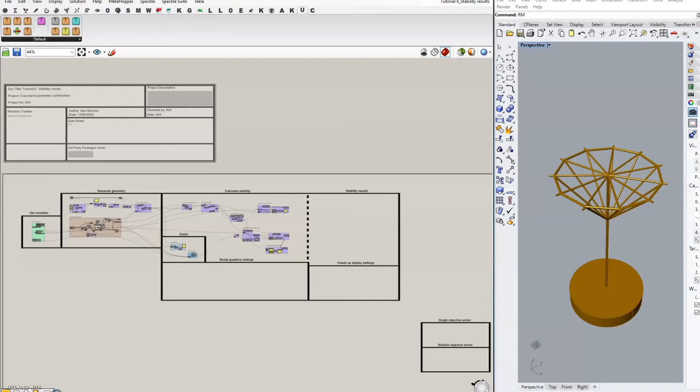And we're going to work out whether or not this actually does fall over or not, given the most unstable condition. We're going to add in an accidental destabilizing load as well. For example, someone could knock the stand quite reasonably from the side, and that's something that we need to take consideration of. So those three things we're going to add in to our stability results, and they're going to feed our heads-up display, and they're going to feed our multi-objective solver and our single objective solver in the next tutorial.

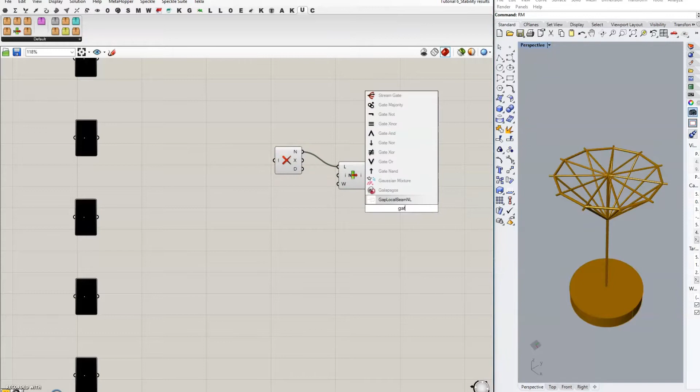Right, so first thing we need to do is grab a null item component. I'll explain why we're doing that in a second. So null item. And then we're going to list item, retrieving a specific item from a list. And I just want to take whatever comes out of here, I want to have the first item. And I'm going to feed that into a gate. Stream filter, which is a gate again, terminology. Right, and I want to set the value of true as 0.

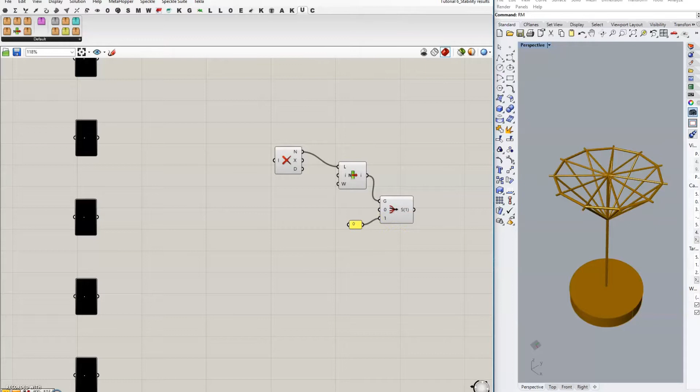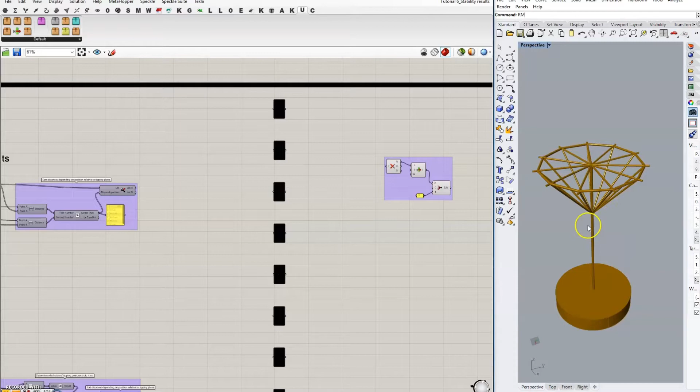Now, what I'm doing here is, I'm going to group those. What I'm doing here is I am accounting for the fact that if the base is a certain size, if it's very small, then all of the coats will produce a destabilizing moment, and none of them will provide a stabilizing moment. And let's turn on some of the coats to see that in action. Where did we get to? Least balanced. Here we go.

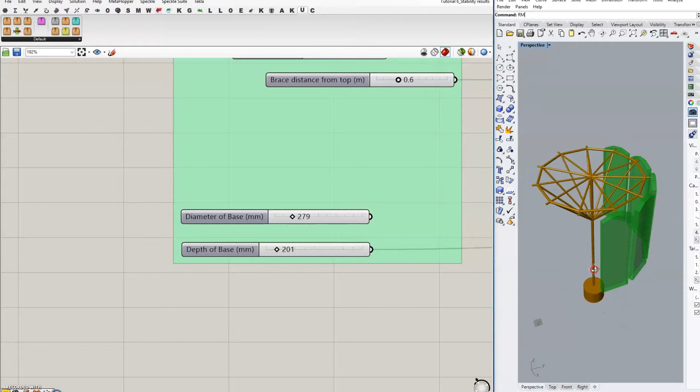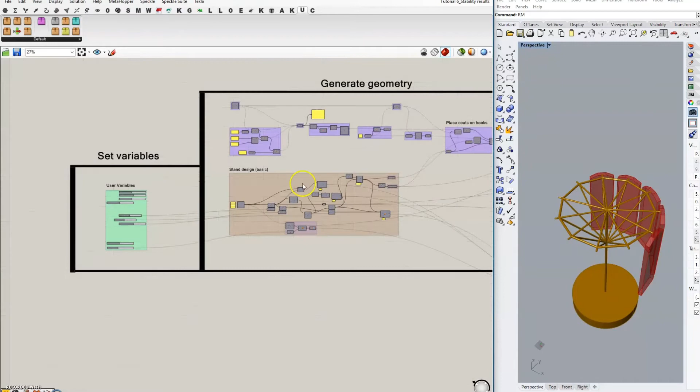So let's add in some geometry, the geometry bin. So there we are. So if I were to make the base of the stand very small, we can understand that all of these are contributing to destabilizing. Whereas if I make the diameter very big, then some of them actually aren't. And potentially if you decide to make the diameter boundary even bigger, they might all contribute to the stability of the base. And we want to be able to know whether or not that's happening. If we don't get any data feeding through into our results, we will get a null flag, and that can disrupt the flow of our script.

So I'm going to connect up list A, remembering that either of these could be null, could have nulls in them, and we want to know that. And if there are no nulls, then we want the data to flow. So if it's false, if there are no nulls, we want that data to flow through. What is that data? The distances, the lever arm of the coats. But if there are nulls, so if all of these are null, then we don't want anything to follow through. The reason for that is because we're going to be multiplying by a load. We don't want any of the nulls to multiply by a load.

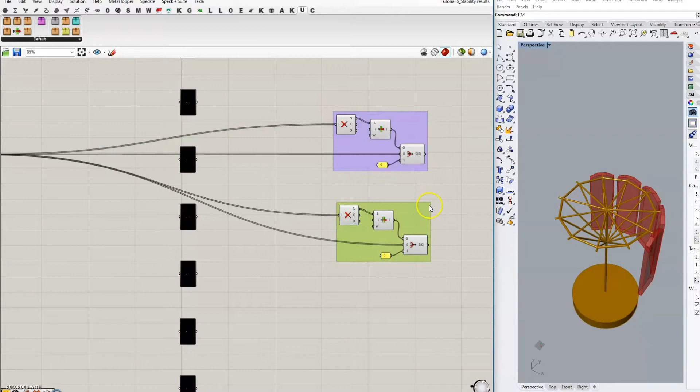So let's copy that. Control C, Control V. Oh, that was lovely and slow, wasn't it? And we're going to, instead of plugging that into list A, it'll be list B for both of those. Nice and simple. And then we're going to use mass addition for both of these. Yep. So these are lever arms on the right and on the left of our axis.

Let's add in a panel here of 50. You might choose a higher value, but I'm going to name that weight of single coat in newtons. It's about 5 kilograms. You may think that we should have a larger value there. Well, that's debatable. So choose whatever you wish. And I'm going to multiply both of these by the coat weight. So we should get moments here.

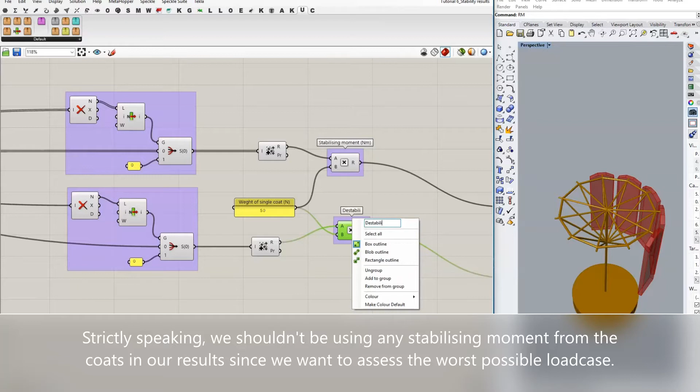And I'm going to choose multiplication, feed in this top one into A, and I'm going to add another one in just a bit lower to feed the lower moments. Let's label them just for clarity. So this one is the stabilizing moment in Newton meters, and this is the destabilizing moment in Newton meters.

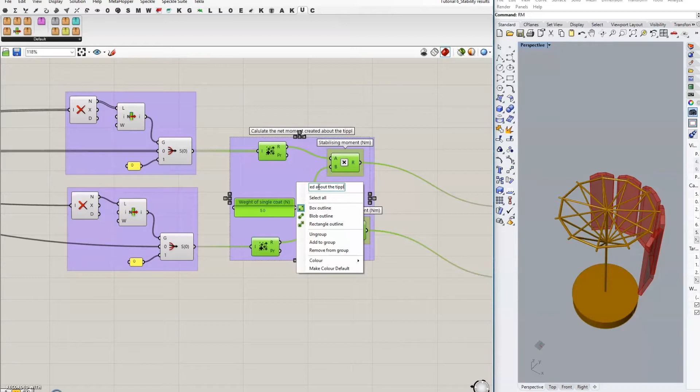And then this whole group is performing another function, isn't it? It's calculating the net moment created about tipping plane. That's all that's doing there. So we have destabilizing net moment from the coats and stabilizing net moment from the coats.

And where the net destabilizing moment from the coats is null, because they're all on the left of our tipping plane. At the moment it's not, but they could be. When null is fed through there, we'll get a 0 distance. That 0 distance will be multiplied by 50 and remain as 0, so we won't get any false moment there. And then we will add a panel, so we can see what's going through, and we'll call that the sum of the destabilizing moments, to be added to in a second.

Okay, and this one, that is a sum of the stabilizing. Whoops. There should be sum of destabilizing moments. Right, so there we've got our two. I'll move these down a little bit lower because we're going to include other values in here.

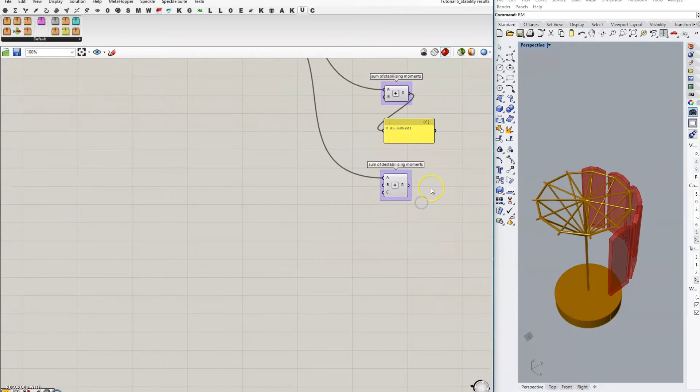The sum of destabilizing moments, we're going to have another entry. So if you zoom in on the component and press insert parameter, that allows us to add as many as we like. You can add hundreds if you want, probably. I've not gone that far. Let's add in our accidental destabilizing load here. So add a panel, type in -50, add another panel in, and type 1.5.

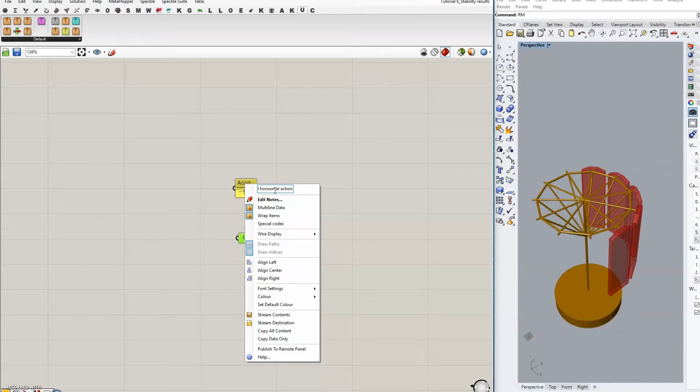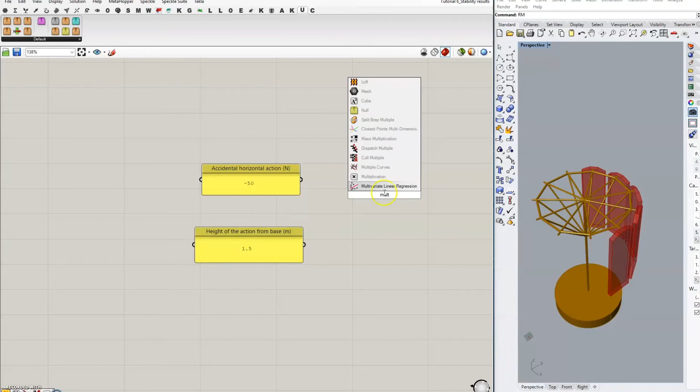So the -50, as you probably guessed, is the accidental horizontal action in newtons. Let's expand it so we can actually see the text. Great. And this one is, have you guessed it, the height of the action from base in meters. So all we have to do is multiply this together and we get our moment. So let's name that accidental destabilizing load.

In newton meters. Great. So to the sum of destabilizing moments, we can now add our accidental load. And let's add in a panel to that too, so that we've got an idea of what the figures are doing. We can see that the destabilizing moments are negative and the stabilizing moments are positive. That's really helpful, isn't it?

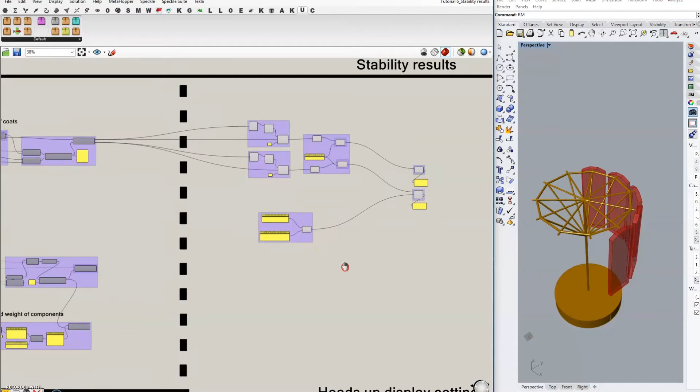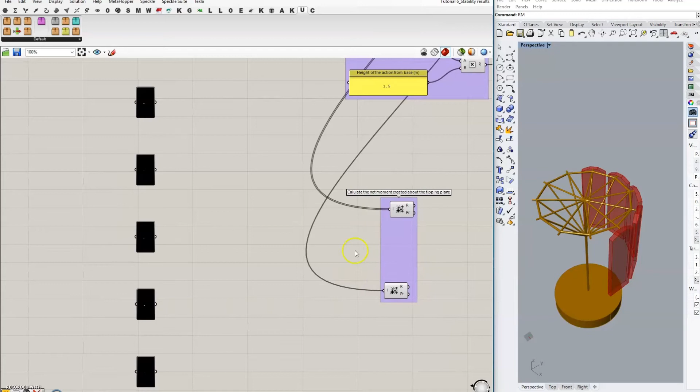Right, we're running out of space here on the canvas, so I'm going to move that up slightly out of the way. Now we need to calculate the net moment of the components, and we're very much in the same setup as with the coat. So let's just copy this here, move it down. We actually don't need the multiplication. Yeah, we don't need to multiply everything. Let's take the name and say Coats. No, this isn't Coats, is it? Just ignore what I'm saying. Right, add in a multiply component. Copy it. Feed that into our mass addition.

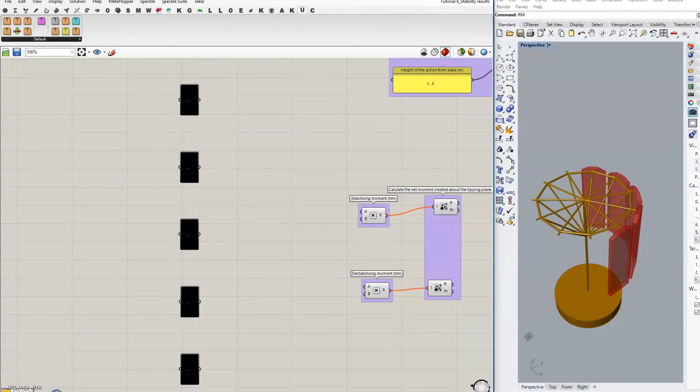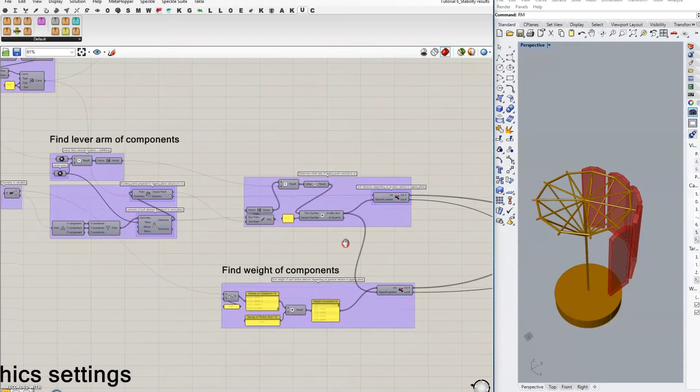This first one is going to be our stabilizing moment from the stand in Newton meters. And this one is going to be our destabilizing moment in Newton meters. Right, now going back to our dispatched lists over here, we're going to choose list A from both of these, multiply them together, and list B from both of these and multiply them together. Because we'd already sorted out in this group whether or not the weight and the lever arm was on the left or the right hand side of our tipping plane.

So now we've multiplied those together. We've got the results, and let's add a panel in so we can just check what's going on here, just to be absolutely sure. This is stabilizing, it's positive, yep. And this is very small, but it's positive. So let's just add in a multiplication, another way that we can do this. And there we go, we've got a negative number. That's purely because of the way that I've set the code up, but it still works. Right, group that together.

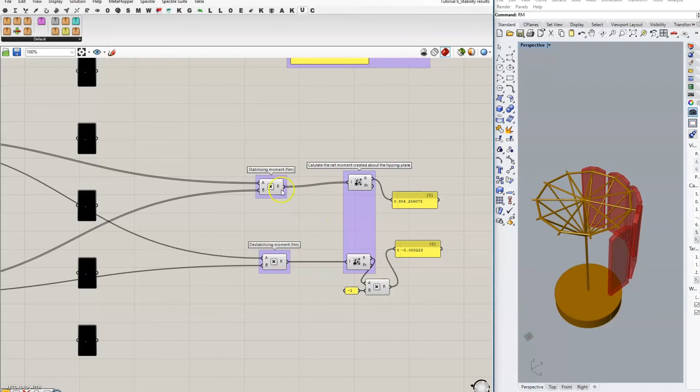And we want to feed in the last portions of stabilizing and destabilizing loads. So stabilizing moment from portions of the stand that are on the right side go in here. And you can see that the stand actually contributes most of the stabilizing moment, which we'd expect. And then destabilizing moment from the stand, we would expect a small number there, a small addition to the overall destabilizing moment. Okay, we're almost there. So I'm going to add these together. I can do that because we've differentiated between positive and negative.

And then that is our total available moment. It's not necessarily the moment applied if the stand is very heavy, but it's the total available moment if the stand were to be at the tipping point. So let's add in a panel to see that figure, 259. Now label that total available moment in Newton meters. And then I'll have an indicator here to remind me what that actually means. So positive is stable. Let's expand it. There we are. Okay. And then let's put smaller than.